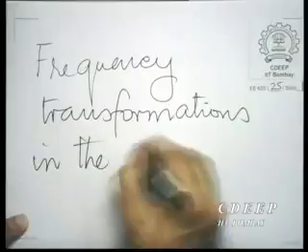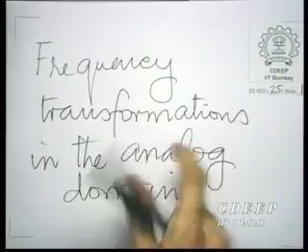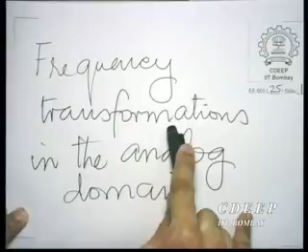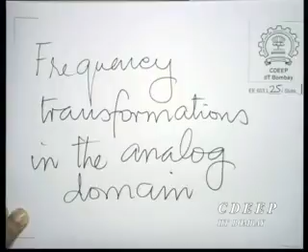and therefore what we are going to do today is to discuss frequency transformations in the analog domain. Now, as the name suggests, frequency transformations refer to a transformation on sinusoidal frequencies. And sinusoidal frequencies come from the imaginary axis in the S plane. So what we expect is a transformation that goes from the imaginary axis to the imaginary axis. And of course the transformation must obey certain requirements. Let us first put down what we mean by a frequency transformation and what we insist that it should obey.

So what do we want of an analog frequency transformation? We want three things once again, as we did when we went from analog to digital or digital to analog. The first thing that we want is preservation of rationality. So essentially, if you denote the complex frequency variable for the low pass filter by SL, then you need a transformation on SL.

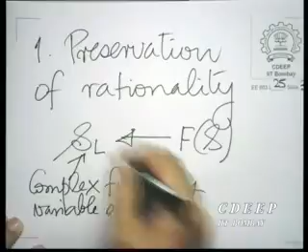Now please note, so far we have always been just writing S for the complex frequency variable of the analog filter. But now we want indeed to have the Laplace variable S, but we want to go through an intermediate step. You want to design a low pass filter and replace the complex frequency variable in the low pass filter by another function of S. So we need to distinguish between these two variables. The complex frequency variable in the low pass filter shall henceforth be referred to as SL, S sub L, and S corresponds to the complex frequency variable in the filter of desired nature.

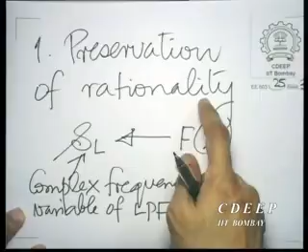This is what we mean by an analog frequency transformation: replace the complex frequency variable in the low pass filter by an appropriate function of S. And obviously, if you want the low pass filter, which is an analog rational function, to continue to be a rational function after the transformation, the only way is that F(s) itself must be rational. There is no choice. Of course, we don't need it to be bilinear or first degree. It could be any degree, but it has to be rational.

Secondly, we want it to preserve stability. And that implies a correspondence between left half planes and right half planes. It is the left half plane and the right half plane in the Laplace variable S that determines stability or otherwise. So we need left half plane to left half plane and right half plane to right half plane mapping.

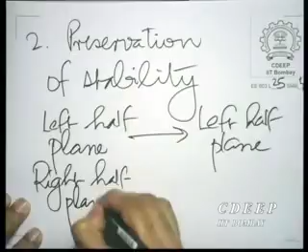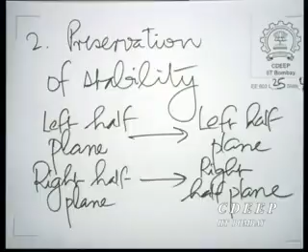That would ensure that if the low pass filter is stable, then this transformation would not create an unstable analog system due to the rational change. Finally, we need a correspondence between the imaginary axes. After all, we are talking about a sinusoidal frequency transformation.

We want the imaginary axis to go to the imaginary axis, otherwise there is no meaning in this transformation. After all, what we want is that a certain set of specifications on the kind of filter that you want to design should translate into corresponding frequency domain specifications for the low pass filter. So the absolutely essential thing is that sinusoidal frequencies from the filter of desired nature must go into sinusoidal frequencies of the low pass filter, and that implies that the imaginary axis in the S plane must go on to the imaginary axis in the SL plane.

Now, we might ask, what is a transformation, or what is a set of transformations that meets all these requirements, and how do we search for such transformations? Here again, our experience of analog functions should come to our aid. If we just reflect a little bit, let's begin with the third requirement. What are those analog functions of S, which when you substitute S equal to j omega give you imaginary quantities in SL? It immediately rings a bell if we think of impedances.

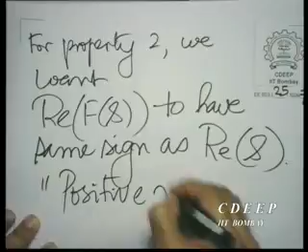What we are saying in effect for property 2 is we want real part of F of S to have the same sign as real part of S. And that is essentially a so-called positive real property of network function. So, even without explicitly verifying this property, if we do indeed use LC networks, we are very likely to be satisfying this implicitly by design. But we shall, when we look at the frequency transformations, explicitly verify this property for each of them.

However, this positive real property of impedance or admittance functions assures us that we are likely to succeed in that endeavor. Finally, we go to the first of the requirements, rationality. Now, rationality is not a problem at all. The impedance or the admittance of LC networks is of course rational in S. So, we don't need to worry about that at all.

So, with that then we have all the properties satisfied, and we can look at the simplest of the three possibilities. We wish to go from low pass to high pass, low pass to band stop, low pass to band pass. And therefore, the simplest of them, as we expect, is low pass to high pass, because in a certain sense, when we go from low pass to high pass, what we are doing is to reverse the roles of frequencies in a way. I will explain what I mean. High pass transformation.

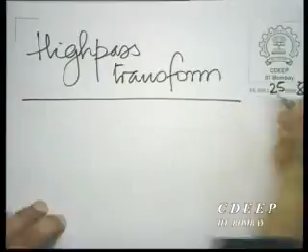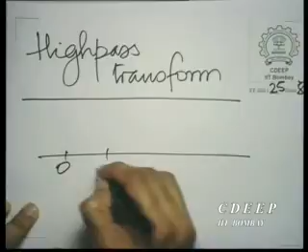Now, you see, in a high pass filter, we have a specification something like this. So, you would expect that you would have a stop band and then a pass band like this. So, what we are saying is, as we go from 0 towards plus infinity, and of course, the same thing is mirrored on the negative side, we do not need to keep drawing the negative side. As we go from 0 to infinity on the omega axis, we expect that we first encounter the stop band and then the pass band.

So, it is very clear that if I want to go from here to a response like this, as I had for the low pass filter, then I should be traversing the frequencies in the opposite direction. So, when I move this way on the high pass frequency axis, I should be moving this way on the low pass frequency axis. That is what it sort of suggests to us, that we want an inversion of behavior.

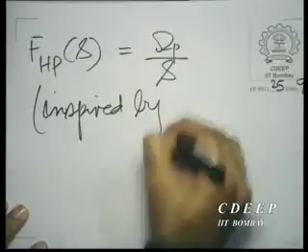And then it is very easy to think of an admittance which gives me inversion. Either the admittance of an inductor or the impedance of a capacitor gives me inversion. So, all that we need to do is to consider a transform like this. F high pass of S is of the form omega p by S, simple, inspired by admittance of an inductance or impedance of capacitance.

Now let us verify what this does to us. Let us start with the last property first. Let us see what it does to the imaginary axis. Let us put S equal to j omega. So what we are doing essentially is we are going to replace SL of the low pass filter by omega p by S.

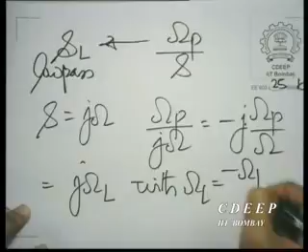So what would we get? When we put S equal to j omega, we would get omega p by j omega, which is minus j omega p by omega. And this is of the form j omega L with omega L equal to minus omega p by omega. So indeed, the sinusoidal frequency behaves as we expect it to, and that was not surprising. You have taken an LC impedance anyway. It is bound to have an imaginary impedance.

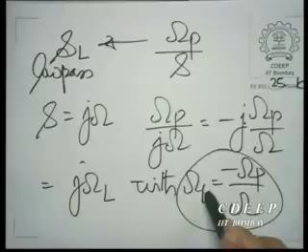But the good thing is, if you now look at the way the frequency changes, let's draw what we call the frequency plot, the frequency transform, the sinusoidal frequency transform, or the frequency mapping. These are different names that are used for this. So the sinusoidal frequency mapping. What we do in a sinusoidal frequency map is we take omega and map it to omega L. Of course, we know that omega L is minus omega p by omega.

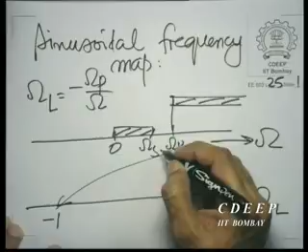So what we are saying essentially is, as omega goes, you see, this is the kind of response that you want in the high pass filter. Now omega p would map to minus 1. Omega s is less than omega p, and therefore minus omega p by omega s is a quantity less than minus 1. So it is behind minus 1. So there we are. Omega s would map there.

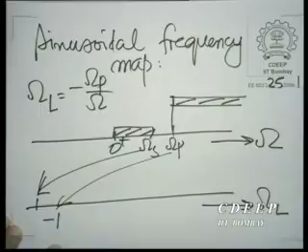And of course 0. Now we must be careful about 0. We don't really go to 0, we say 0 plus. 0 plus means a very small positive value, and you can make that small as you desire to move to 0. So a very small positive value here would go to minus infinity. So in fact 0 plus takes you to minus infinity. So we can draw that. This goes to minus infinity.

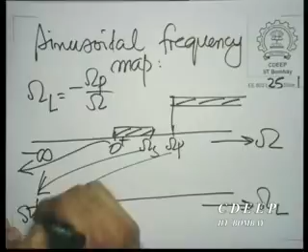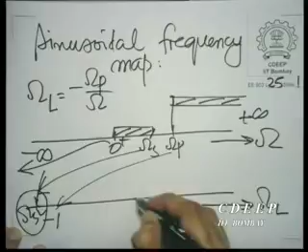So there we are. Let's call this omega SL, this point where the edge of the stop band maps. So the stop band now maps between minus infinity and minus omega SL. And minus omega SL is of course behind minus 1. Further, what happens to plus infinity? Now plus infinity maps clearly to 0 minus. So plus infinity maps to 0 minus.

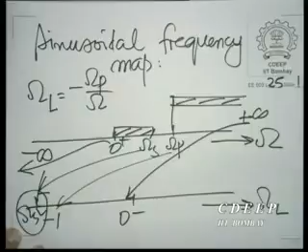When you say plus infinity, you mean a positive number that grows without bound. So when you do minus omega p by omega, if omega is a positive number that grows without bound, this would tend to a negative number that becomes as small as you desire in magnitude. That is what you mean by 0 minus. And therefore, the pass band is brought between minus 1 and 0. The stop band is taken between minus infinity and minus omega SL. And that indeed is what you expect for a low pass filter.

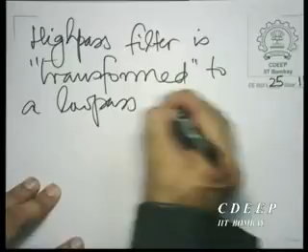That means the high pass filter is thus transformed to a low pass filter as follows. Plus 1, of course there is symmetry. So the pass band is brought between minus 1 and 0 and therefore also between 0 and 1. The stop band is brought between omega SL and plus infinity and minus omega SL and minus infinity.

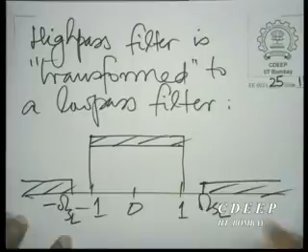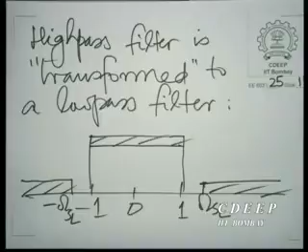Remember, the pass band and stop band tolerances are carried as they are. The dependent variable is carried as it is, that is not affected. So when you bring the frequencies from omega to omega L, no effect is seen on the dependent variable. That means the tolerances are carried as they are, so those are unaffected. If you desire a certain set of tolerances in the high pass filter, the same set of tolerances are carried into the low pass filter. Tolerances carried as is.

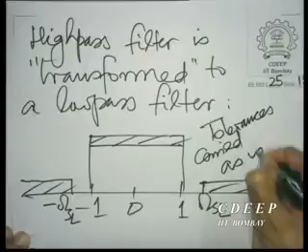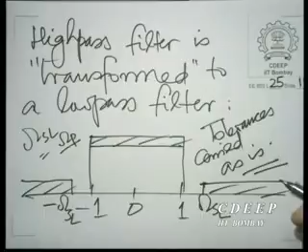And of course omega SL is omega p by omega s for the high pass filter, where omega p is more than omega s.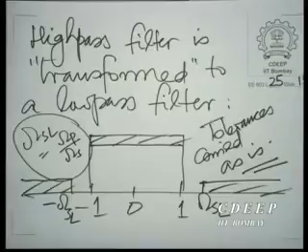Yes, there is a question. The question is, would the maximum value of omega be pi? Now please remember that we have already come to the analog domain. What was from 0 to pi has now been brought to 0 to infinity by the bilinear transform. So now we are no longer dealing with the discrete angular normalized frequency. We are now dealing with an analog frequency which has emerged from the bilinear transform. Yes?

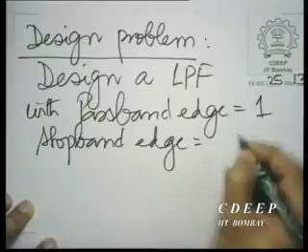So much for the high pass. Therefore the high pass filter design problem is easy to formulate now. Design a corresponding low pass filter with pass band edge equal to 1, stop band edge equal to omega p by omega s. Pass band, stop band, tolerances and nature carried as they are.

As are. What I mean by that is, if the pass band is monotonic, let it continue to be monotonic in the low pass filter. If the pass band were equiripple, let it be equiripple here. So too for the stop band. And that means you now have the tools to do it. You can design it using the Butterworth approximation or the Chebyshev approximation, or if you are trying out any of the other two, inverse Chebyshev or elliptic, you could do that.

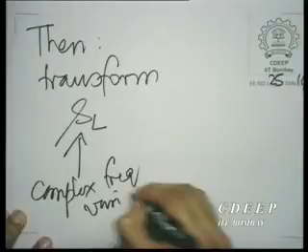And then, having designed this low pass filter, the next step would be to make a frequency transformation. So then transform SL, that is the complex frequency variable of the low pass filter, or Laplace variable of the low pass filter, using omega p by s. Replace SL by omega p by s and you get the high pass filter that you desire.

Yes, there is a question. So the question is, how do we prove the tolerances are carried as they are? We don't need to prove anything there. You see, what we are moving is the independent variable. Now, what value the function takes at that independent variable is unchanged. All that you are saying is that I am evaluating the function at this value of the independent variable, and that is anyway specified in the original filter.

So I am saying the whole dependent variable is carried as it is. There is nothing to be proved there. You just have to note that you are making a transformation on the independent variable, and there is no change of the dependent variable at every given point. That is carried as it is.

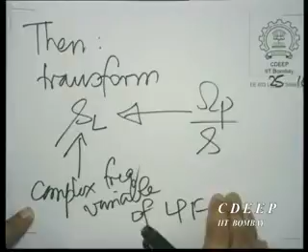Alright, now having made this transformation, SL replaced by omega p by s, we now need to check whether we have obeyed the other two requirements of rationality and stability. Now rationality is obvious. This is a rational transformation, so if the original low pass filter is rational as it is expected to be, then this transformation would retain the rational character. So rationality is not a problem. But stability we need to check. So we need to check what this does to the real part.

So let us consider s to be sigma plus j omega, whereupon SL becomes omega p divided by sigma plus j omega, which can be rewritten as omega p into sigma minus j omega divided by sigma squared plus omega squared. And therefore, the real part of SL is omega p sigma divided by sigma squared plus omega squared.

Now it is very obvious that if sigma is positive, so is the real part of SL, because omega p is a positive quantity and sigma squared plus omega squared is bound to be positive. If sigma is positive, then sigma squared plus omega squared has no choice but to be positive. It can't be 0. And omega p is positive, so the sign of sigma is carried to the real part of SL. If sigma is positive, the real part of SL is positive. If sigma is negative, the real part of SL is negative.

And therefore the left half plane goes to the left half plane and the right half plane goes to the right half plane. What it means is, you cannot possibly have poles coming to the right half plane if you did not have them in the first place in the low pass filter. That is because a point of the right half plane in the filter of desired nature goes to a point in the right half plane of the low pass filter, and that could not possibly have been a pole. And therefore, the poles can only be in the left half plane.

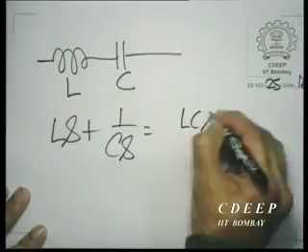So we have an L and a C, and of course we have Ls plus 1 by Cs. So that gives us LCs squared plus 1 divided by Cs. Now we can divide by LC in the numerator and denominator, and that gives us something which we will write as s squared plus omega naught squared by Bs, where omega naught squared is 1 by LC and B is a positive quantity equal to 1 by L.

Let us consider this transformation. Now omega naught squared, which is 1 by LC, has a very important physical significance. In fact, all of us would probably be aware that for an LC network, that corresponds to what is called the resonant frequency of the network, the resonant angular frequency of the network. In fact, it is that frequency at which this impedance vanishes.

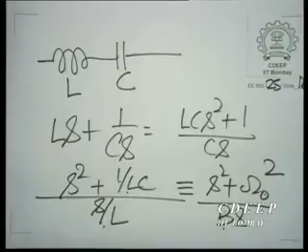So, you see, the interesting thing is that B also has a significance, but that significance we may not all be aware of, and let us not be too worried about it for the moment. We will see it in the long run. At the moment, we will just regard B as a positive quantity. It is the reciprocal of L, so 1 by L. So let us consider as a candidate sL to be replaced by F_BP(s), where F_BP(s) is s squared plus omega naught squared divided by Bs.

And let us go through the exercise first of checking, now we will do it the other way. We will first check property 1, then property 2, and then we will look at property 3. So of course property 1 is obvious again. This is a rational transformation, rationality is going to be maintained. So if the original low pass filter is rational, the transformed filter has no choice but to be rational, because you are replacing sL by a rational function of s. So rationality is maintained anyway.

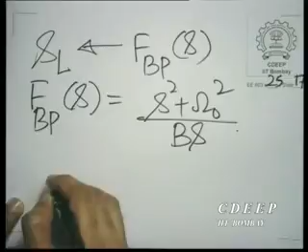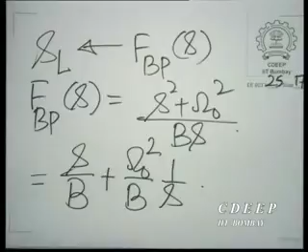Now we need to look at the second property, stability. So all that we need to do is to substitute s equal to, in fact, we can do something simpler. Let us divide this into two parts. Let us write this as s by B plus omega naught squared by B into 1 by s. And now let us substitute s equal to sigma plus j omega. And then we have sL becomes sigma plus j omega divided by B plus omega naught squared by B into 1 by s, which is sigma minus j omega divided by sigma squared plus omega squared.

And therefore, if you write sL as sigma L plus j omega L, then sigma L is 1 by B times sigma plus omega naught squared by B into sigma by sigma squared plus omega squared. We are taking the real part out. This is the real part of this quantity and this is the real part of this quantity. So we have extracted them. Now you see it is obvious.

If sigma is positive, then this has no choice but to be positive, and neither does this. Because 1 by B is positive, omega naught squared by B is positive. If sigma is positive, sigma squared plus omega squared cannot possibly be 0. It has to be positive anyway. And therefore, this is bound to be positive and so is this, and therefore sigma L is positive.

On the other hand, if sigma is negative, then this is bound to be negative. And this is definitely bound to be non-zero, because sigma squared plus omega squared can't possibly be 0 if sigma is negative. It's bound to be positive. So this whole thing would become negative. So a negative quantity plus a negative quantity would give a negative quantity. And therefore, sigma and sigma L necessarily have the same sign, strictly. If sigma is positive, then sigma L is positive. Sigma is negative, sigma L is negative.

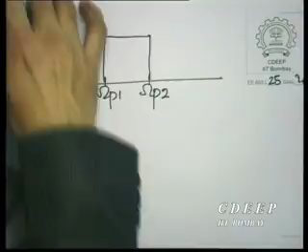Yes, please, there's a question. So the question is, what are we practically doing when we make this transformation? Now the answer is, all this is still in the phase of design. So we are not realizing it as yet. So all this is still design, and we are computing the filter coefficients. We have not yet reached a point where we have obtained the filter coefficients. We are yet designing on paper. After we have completed the design on paper, then we would translate it into a realization. So as yet all this design is in calculation.

Right? So we have specifications for the discrete time filter. We have converted them into specifications for the desired kind of analog filter. Now we are going into the specifications of the desired kind of low pass filter. We will see in a minute. We will design that low pass filter. We will then convert S by using the bilinear transform, and there we get a discrete time filter that we would try to realize. So realization is after completing the design.

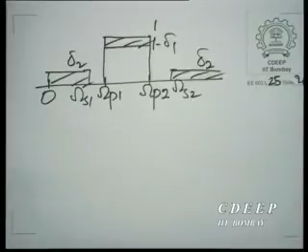So there we have a band pass filter, and we assume as usual that we have tolerances. Now we are quite satisfied with letting the pass band be between 1 and 1 minus delta 1, and the stop band be not more than delta 2 in magnitude, and of course the nature can be specified. Now you see, you will have to decide on the nature of the stop bands here. There are two stop bands, so you can't have different natures for the two stop bands. Either both of them must be monotonic or both of them must be equiripple. We don't at the moment have a facility to allow different kinds of natures for the two stop bands.

Anyway, we do have a facility to allow different tolerances in the two stop bands. All that we need to do is, if the tolerances are different, consider the stronger of the tolerances. So for example, if one of the stop bands has a tolerance which forces it to be less than 0.1 and the other one must be less than 0.09, then it is 0.09 that you must choose in your design. Choose the stronger or the more stringent one. If you are satisfying 0.09, you are of course satisfying 0.1. Take the more stringent. Having done that, we can agree on a set of specifications like this.

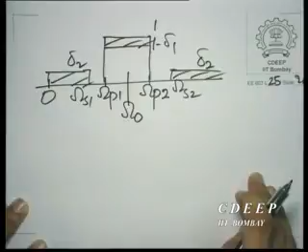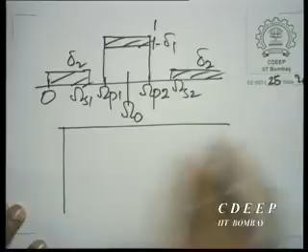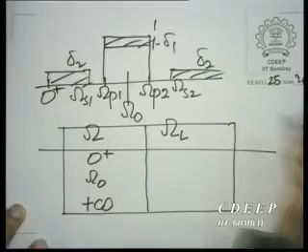Let's put omega naught somewhere in between here. We expect omega naught to be somewhere in between here. And now let's see where this maps. Let's make a mapping of what are called some critical frequencies. So we have omega mapping to omega L. The critical frequencies are actually 0, omega naught and plus infinity, or rather 0 plus. 0 plus means a very small positive frequency which goes almost to 0. And the mapping of course as you know is omega L is omega squared minus omega naught squared by b omega. This is the mapping.

Now it is very easy to see that omega equal to 0 plus, you see, this is a little tricky. Now if it is 0 plus, then this is of course 0. This is minus omega naught squared by b into 0 plus. So it is minus infinity. Because you have a quantity in the denominator which is very small and positive. Here you have a fixed negative quantity. A fixed negative quantity divided by a very small positive quantity gives you an infinite negative quantity.

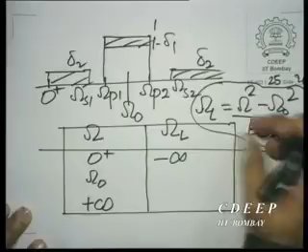What about omega naught? That is very easy to see. Omega naught maps to 0. And as you go towards plus infinity, now let us see what happens. Omega L can also be written as omega by b minus omega naught squared by b omega. So as omega goes to plus infinity, this quantity goes to 0 and this quantity goes to plus infinity. So therefore, omega equal to plus infinity goes to plus infinity.

Now what happens in between? We have only taken the critical points. What happens in between? We need to see that too. So for that, let us write down this expression here. Omega L is omega by b minus omega naught squared by b omega. So omega L is omega by b minus omega naught squared by b omega.

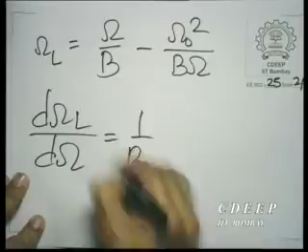So d omega L d omega is 1 by b plus omega naught squared by b times omega squared. So it is strictly greater than 0 when omega runs from 0 plus to infinity. That is obvious, because when omega is positive, then this is definitely positive. What it means is that as you increase omega from 0 plus towards infinity, you expect omega L also to monotonically strictly increase.

And therefore, going back to the previous table here, as you go from 0 plus towards plus infinity, 0 plus is at minus infinity on omega L, omega naught is at 0 and plus infinity goes to plus infinity. So as you move omega from 0 plus towards plus infinity, omega L would move monotonically from minus infinity to plus infinity and omega naught would come to 0.

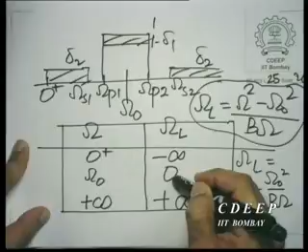Now you see the situation is like this. 0 plus would go to minus infinity. Somewhere in between you will have a mapping of omega S1. Then you would have a mapping of omega P1. Then you would have 0 here. Then you would have a mapping of omega P2. And then you would have a mapping of omega S2 and finally plus infinity. It is going to follow the same sequence.

Now, you see, we have full control on choosing omega naught squared and b to meet the specifications that we want. What are the specifications? The first thing is that you want a symmetric magnitude response. So this is going to map to some point on the negative axis and this is going to map to some point on the positive axis. You want them to be equal and opposite.

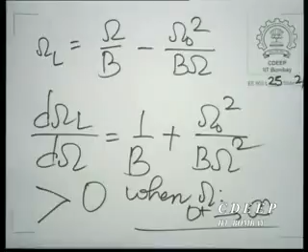So what you want first is that omega P1 squared minus omega naught squared divided by b omega P1 should be equal to minus of omega P2 squared minus omega naught squared divided by b times omega P2, for magnitude symmetry, for symmetric passband edge. Otherwise the low pass filter would have one negative passband edge and a different positive passband edge. We can't allow that.

Now we can solve this. It's very easy to solve this. And in fact one would obtain omega naught squared is omega P1 into omega P2, which is very interesting. This is not at all a difficult equation to solve. It's a simple linear equation in omega naught squared, so you can easily solve it. What it says is that the so-called center frequency or the resonant frequency, as we chose it in the beginning, is the geometric mean of the passband edges.

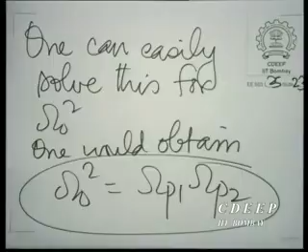So omega naught squared is determined. Now what is it that would determine B? Actually nothing at all, but we can put something down to make our whole life easier. You remember in the high pass filter we had put down the low pass passband edge as 1. Let's standardize that to make life easy. What we have said so far is that the passband edge on the positive side and on the negative side must be the negative of one another. But let's make that 1 and minus 1. That makes life easier.

So let us ask for, this is our choice, omega p1 to map to minus 1 or equivalently omega p2 to map to plus 1.

That means omega p1 whole squared minus omega p1 omega p2, because now we have agreed that omega naught squared must be omega p1 omega p2, divided by B omega p1 should be equal to minus 1. That would very clearly give us B is omega p2 minus omega p1, and the same thing would follow if you put the condition on omega p2. So now we have an explicit value for B and for omega naught.

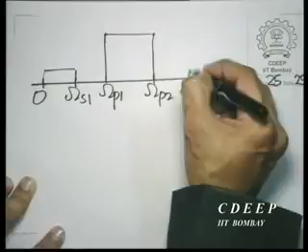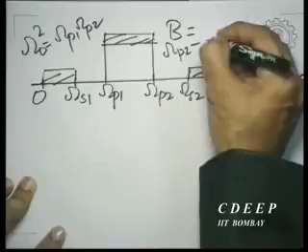So in fact our band pass transform is complete and we are now in a position to design band pass filters too. What do we need to do? Let's just put down the steps. We have this band pass filter. First step, take omega naught squared equal to omega p1 omega p2, B equal to omega p2 minus omega p1, and now we know why we call this B. B stands for bandwidth. So in a way B is the length of the passband.

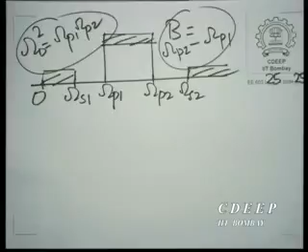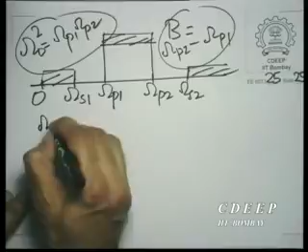Having taken that, the next step is to design a low pass filter with the following specs. You see, omega S1 would transform to omega SL1. Omega SL1 is omega S1 squared minus omega naught squared divided by B omega S1, and similarly omega S2 would translate to omega S2 squared minus omega naught squared divided by B omega S2. Now omega SL1 would definitely be negative and this would be positive.

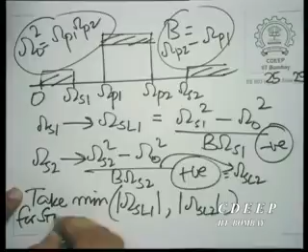Take the smaller of mod omega SL1 and mod omega SL2. This is omega SL for stop band edge. You see, what we are saying in effect is that the pass band edge is of course 1, but this would give us one stop band edge here and this would give us another stop band edge. Which of them should we take? They may not be equal.

So naturally you must take the stringent, the tougher condition there. Which is the tougher condition? The one which is closer. That's why we have taken a minimum here. So take the minimum of the modulus of omega SL1 and the modulus of omega SL2. Whichever is less, that means it's closer. Of course, both of them will be more than 1 in magnitude, that is for sure. But the one which has a smaller magnitude should be chosen as the stop band edge.

So now you know the pass band edge of the low pass filter, you know the nature of the pass band, you know the stop band edge of the low pass filter, the more stringent of the two. You know the nature of the stop band, the tolerance in the pass band, the tolerance in the stop band. So you can design the low pass filter using either the Butterworth or the Chebyshev or inverse Chebyshev or elliptic approximation, and then transform the low pass variable SL using S squared plus omega naught squared by Bs, where you know what omega naught squared and B are.